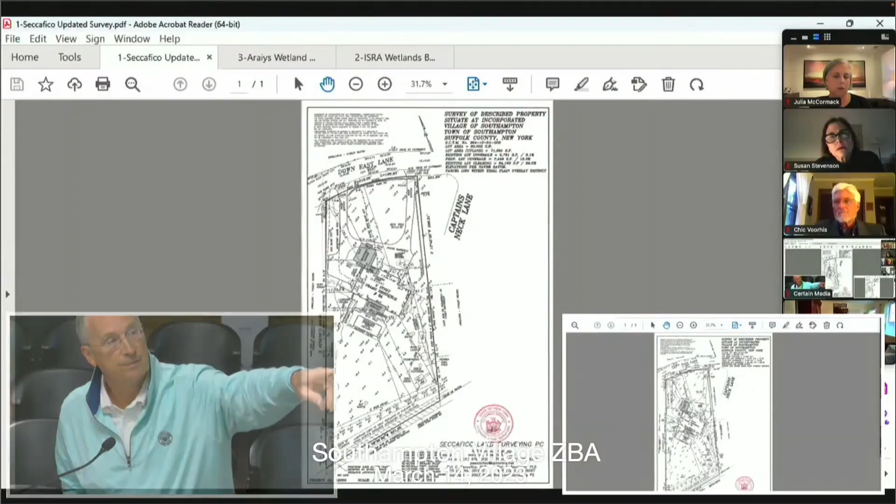At the last meeting, the board asked for a survey showing the position of the existing structures: the fence, the swing set, the trampoline, the stepping stones. So the survey was updated. I'm going to ask John from my office to put that up on the screen so you can see it. All those structures are now located down in the southeast corner of the property, along with the fence. You should all have hard copies of this as well. So there you can see in the corner the play set, the trampoline, the tree swing, and the wire fence.

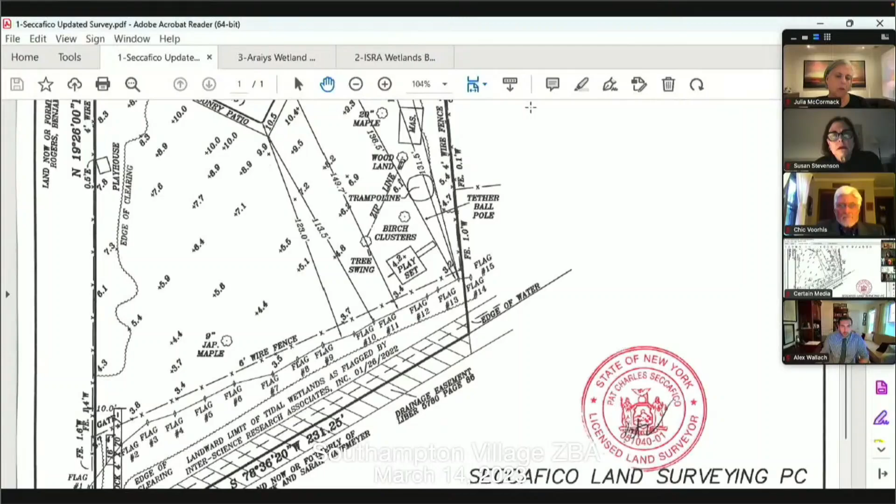We have topography on the survey, and you'll see over here in the bottom left-hand corner where the slate is located, which is where the dock would be.

You asked for a setback for the swing set to the property line and the trampoline to the property line. Although it's not on the drawing, we spoke with the surveyor, Pat Seccafico, this morning. I just found that out yesterday, and we weren't able to get that onto the drawing for you. So the swing set is 19.1 feet from the eastern property line, where the play set is, and the trampoline is 11.2 feet. These are features sitting on the ground. The trampoline is not anchored at all, it just has metal bottom rungs that sit on top of the grass.

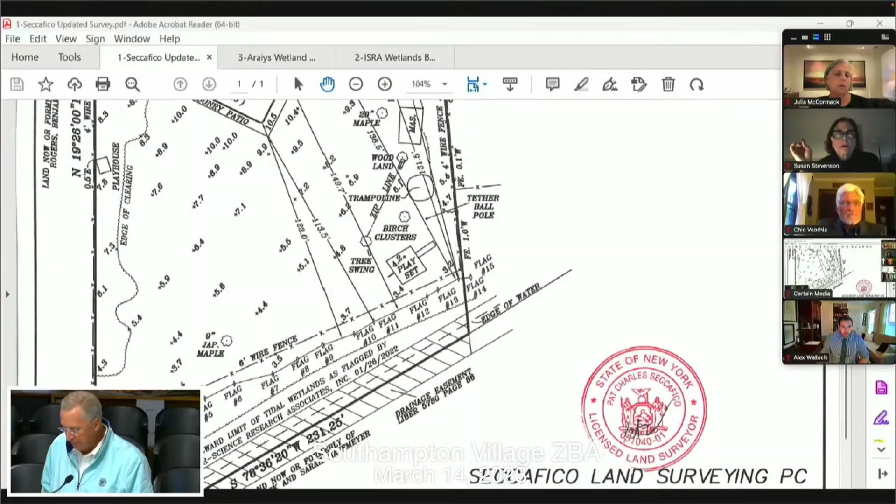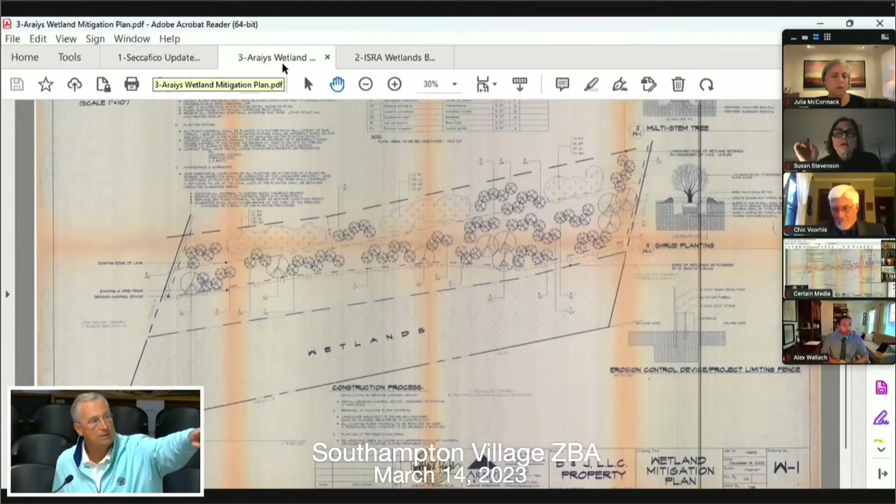The planting plan — you asked for the approved buffer plan to be overlaid on top of the proposed buffer plan. John, can you put up our drawing? Yeah, so this is the Araiys plan, the plan that was approved 23 years ago, which you now have in your file. In this drawing you'll see the property boundary lines at the southern end of the property. You see that dashed line right above where it says wetlands — that's the wetlands line determined at the time this plan was done, and you'll see the buffer that goes up above that.

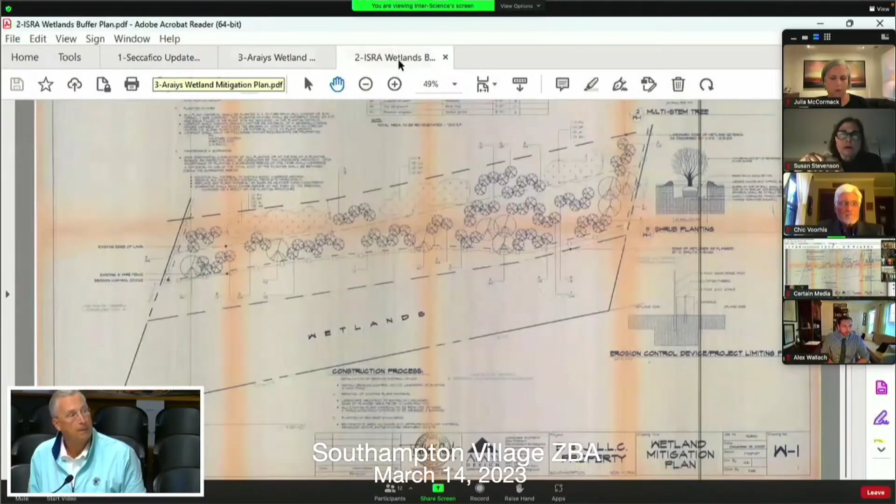We asked to have this overlaid on top of our drawing, so we put that on top of ours. John, can you bring ours up? So you'll see this yellow line right here — yellow and blue line — that is the buffer line edge that was part of the approved plan. And you'll see the other coloration showing the different vegetation, which is showing where we're proposing the buffer now.

You asked about calculating the buffer width between the approved plan and the proposed plan. Because the two wetlands lines are different, it's hard to compare apples to apples, so I measured them from the southern property line. The yellow line showing the buffer created 23 years ago is about 75 feet from the southern property line on average. On our plan, it extends considerably more landward on the western side and gets closer on the eastern side. On the western side it's about 128 feet at its deepest point, and at the shallowest point about 38 feet. Averaging those out, we're probably about an 80-foot buffer by the time we're done. That's the way I've roughly calculated it.

About 60% of the frontage of this property has a buffer that's greater than what was proposed last time through — essentially this area through here and this area through here. This would be the remainder that is less than the 75 foot, which is this zone through here.

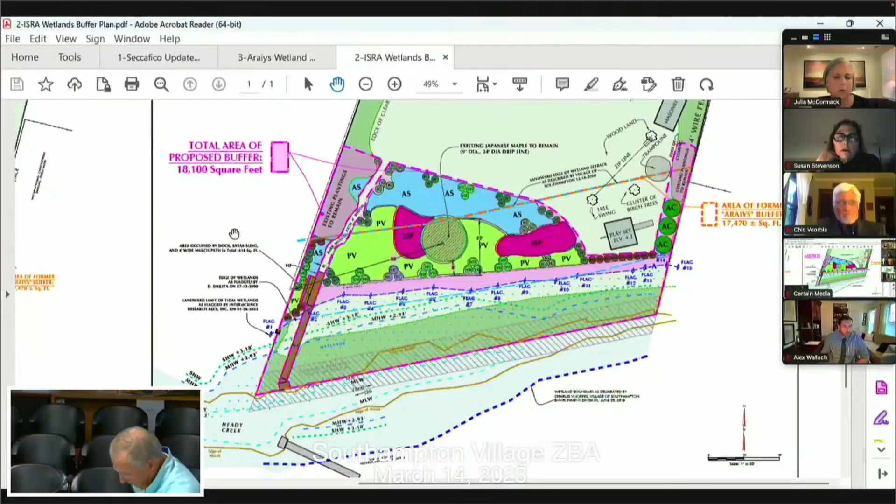You asked at the last meeting that the proposed buffer be expanded and the area of lawn around the swing set be reduced, so that has been done. The area was originally about 65 feet wide around the swing set; where the grass is now, it's 38 feet wide at that narrowest point. The buffer is actually increased in size.

If you look at the area of what was originally the buffer, that was 17,470 square feet. We're now at 18,100 square feet. So we've provided a larger buffer than what had originally been approved.

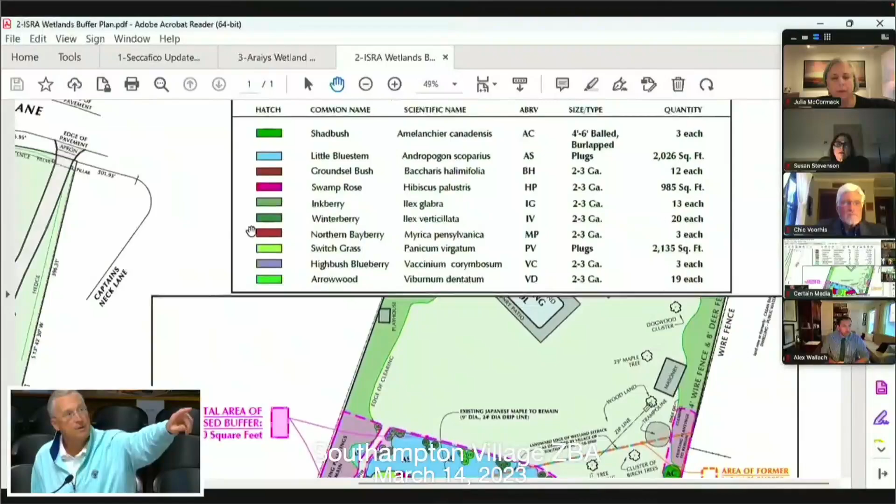You asked for information regarding the spacing and quantity of little bluestem and panicum. John, can you just scroll up on the top, the legend? You actually asked for some details on the planting, so we've provided that information here on this plan.

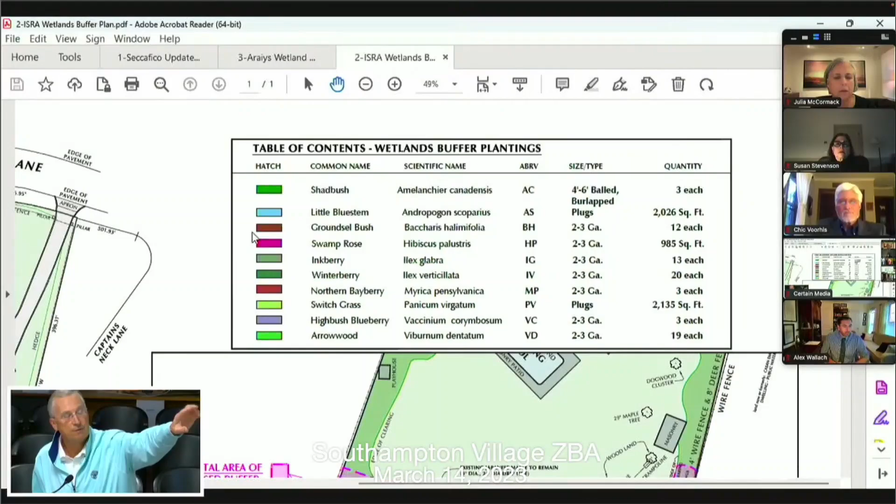I noticed in looking at this that it didn't have the actual spacing for the little bluestem or the panicum, so we confirmed that they would be planted as plugs 1 foot on center. It's a pretty dense planting in those areas where you'll see the square footage under quantities. For the switchgrass, we have 2,135 square feet, and for the little bluestem, it's 2,026 square feet. Those areas would be planted 1 foot on center.

The buffer is going to consist of native trees and shrubs - shadbush, groundsel-bush, inkberry, highbush blueberry, and arrowwood - along with drifts of native wildflowers and grasses like switchgrass, little bluestem grass, and swamp rose. Can you scroll back to the image, John?

So you'll see here on the side of the southwest corner, it shows the proposed catwalk. We've kept that on the plan. It's a 4-foot wide catwalk with a rack for a kayak sling, which you'll see on the west side of the walkway - really just some bars so someone can lift a kayak and leave it there instead of dragging it back and putting it in the lawn.

So we have a 4-foot by 20-foot ramp that adjoins the kayak rack, a 24-foot long fixed catwalk elevated 4.5 feet above grade, and a 20-foot section ramping back down to the little platform. That's right at the edge of the small platform that provides access to the water.

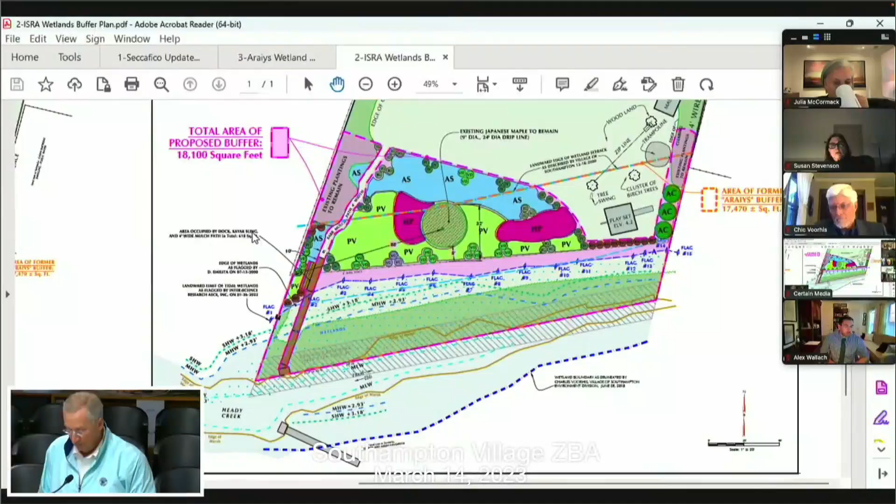There's a ladder that will provide the ability to climb up and down once you get your kayak down into the water, and it's really to provide access for kayaks and canoes. You've got shallow water coming into this creek, and the owner has a mooring further out where he can put a motorized vessel. This is essentially identical to what is across the pond in terms of functional use.

You can see on the bottom of our drawing, that's at 405 Captain's Neck Lane. We had actually done that approval for those people some time ago.

The construction's all untreated materials. It'll have an open grating surface, minimum light transparency is 60%, so it's that open grate that allows vegetation to grow underneath. It'll all be constructed by hand. We've received permits for the dock from the trustees, the DEC, the Department of State, and the Army Corps.

So I guess I'm here to try to fill in for Jim, but we think that the buffer plan we have is reasonable given that this client purchased this property with an understanding at the time that there wasn't a buffer here. We've tried to be fair and reasonable in terms of the size and location of the buffer, and the ability for him to have a small play area for his children, down in an area on the lawn that's flat. You have a sloping area from the pool down to this corner, so it's actually a flat area where there's a place for the kids to play.

So we don't believe that this revised buffer plan will have any negative impacts to the protection of the waters of Heady Creek, and we think it's substantial - it'll remove a substantial part of the lawn. So I'm here to answer any questions you might have with respect to this.

Sure. Good evening, everyone. Thanks for the introduction earlier, Mark, and where to look, Rich. Good to see you. Thank you for the summary from you and Carl as well. Trying to figure out where to look. Probably on the TV screen. I'm not there in person, obviously.

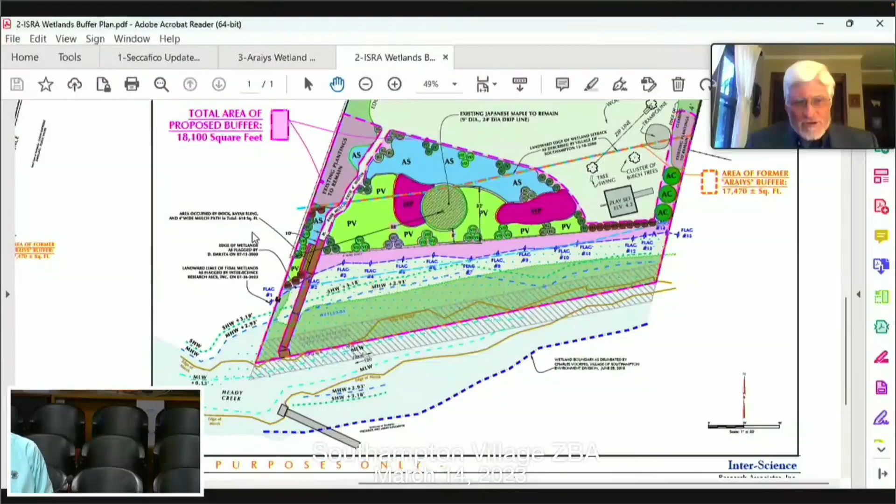So, thank you, Mark. Rich was describing a submission that was submitted to the village on February 24th. Rich did a good job identifying the discussion from the last meeting and bringing things up to date. I'll further note that at this time on the plan, the prior buffer is shown, so we have a relative understanding of the prior approval, the buffer area, and how large that was. The buffer equivalent shown is really the expanded buffer, as described, that exceeds the area of the original buffer.

The planting plan detail has been added - that was one of the requests - and the native plantings shown are acceptable. I do think it's important to look critically at the area where the buffer is being encroached upon, and that is specifically the play set and some of the other recreational items, such as the trampoline.

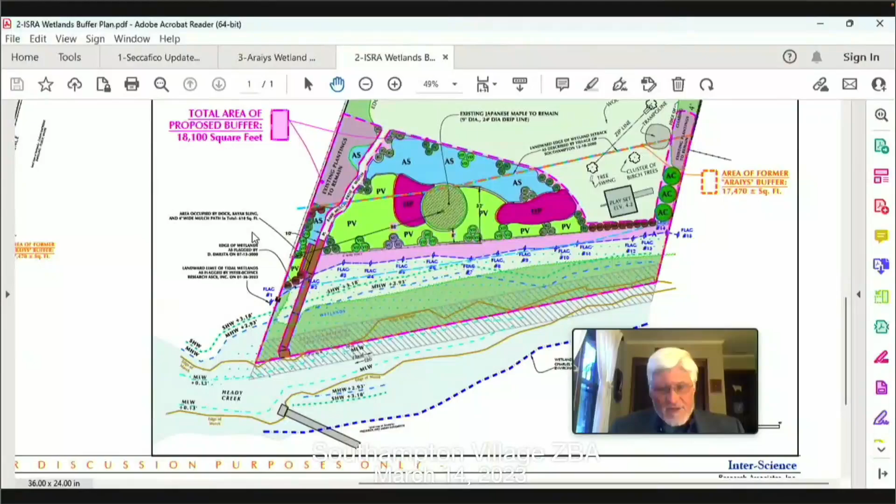In doing that, I want to go back to the village law under Chapter 116 and what it's trying to do. If something like this came before us now, we would be looking at a buffer of 125 feet. A greater buffer provides greater protection for the wetlands, and it's considered adjacent area - at least that's how the state defines it. But in village law, it is the landscape buffer, and it's intended to be naturally maintained or revegetated.

That adjacent area protects the wetlands and their environmental benefits. The wetlands themselves have many benefits, including habitat, biological productivity, ecosystem cleansing, absorption of silt and organic materials, shoreline protection, flood control, and in some areas educational value. That's the benefit of the wetlands associated with the creek that this adjoins. The actual adjacent area, or the village landscape buffer, is very important for protecting those wetlands. It also provides its own wildlife habitat, pollution absorption, erosion control, and further protects the wetlands.

So we know natural buffers are important. They also reduce the fertilized lawn area, and reduce areas for congregation of dogs, geese, or other animal life that may impact wetlands, other than native species, because it becomes a recreational area as opposed to a buffer area. The wider the buffer, the better the protection, and this is reflected in village law under Chapter 116. So in my mind, ideally, the play set should not be so close to the wetlands.

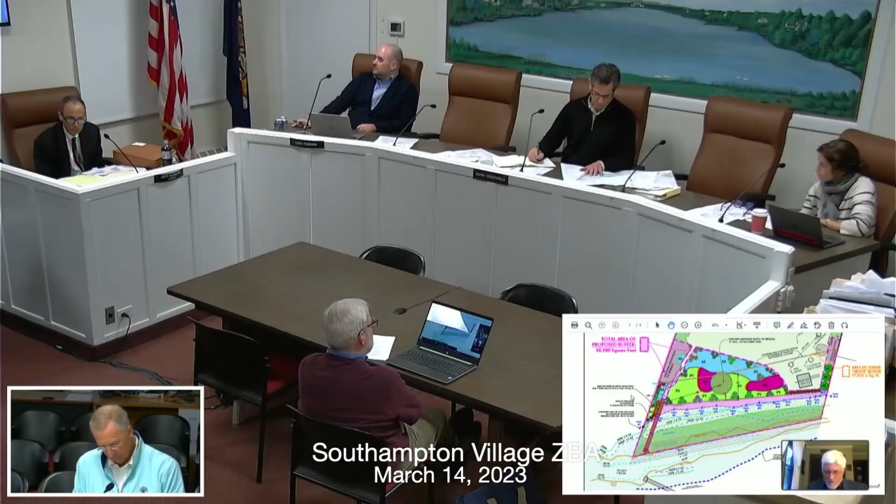So I can further comment on mitigation or other ways to help maintain the play set, but also have some environmental compatibility, if the board wishes to consider that further. I'll pause there and see if there are any further questions, or how much discussion we want to get into on the placement of the play set itself.

Ideally, under current law and current review, it would not be located in this location. And there are other areas on the property where it could be located.

If we were to consider allowing it to remain, I would look for additional mitigation because of the encroachment within the setback area, and that minimized buffer. Yes, this does achieve a buffer equivalent, but if you look at the placement of it and its proximity to the wetlands, I think additional mitigation really is appropriate.

I'll spell that out again for the ZBA to consider and for the applicant to consider as well. It was mentioned that the trampoline is a movable object, just a moment ago by Rich. That should really not be within the area that is part of what would have been the buffer imposed in 2000. So moving that out would not be a hardship, and there's plenty of other area for that to be relocated to.

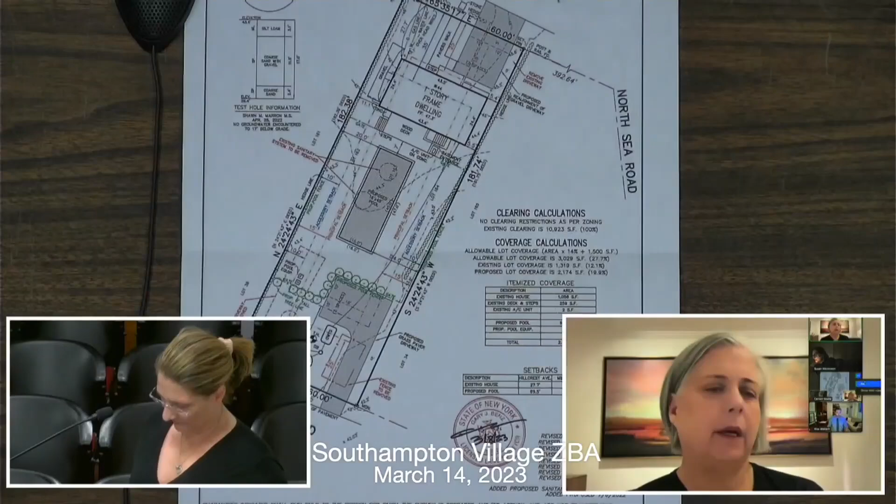Face it toward the board. That's good, yeah, you can zoom in. There we go. Okay, does that work? We needed full screen if that's possible.

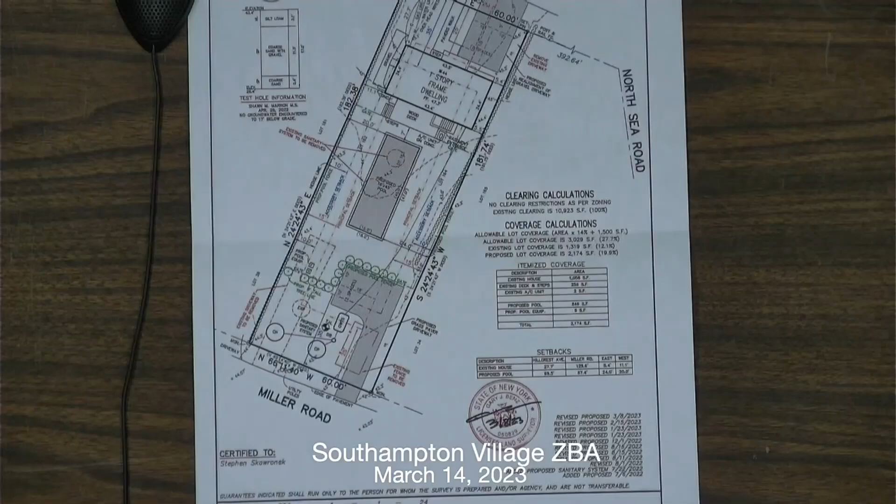Hey Council, I'm gonna walk away so you can see. Can we full screen and zoom in a little bit? That's full screen as it gets, unless you turn it sideways. See, one like that, you can turn it sideways, then we can see the parking. You want to see the front first, or I can do both at the same time. It's really the parking we're focused on, isn't it?

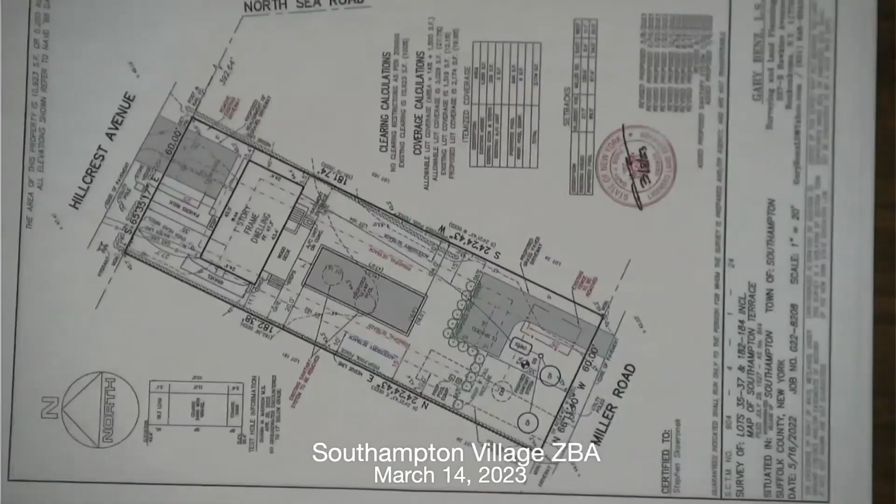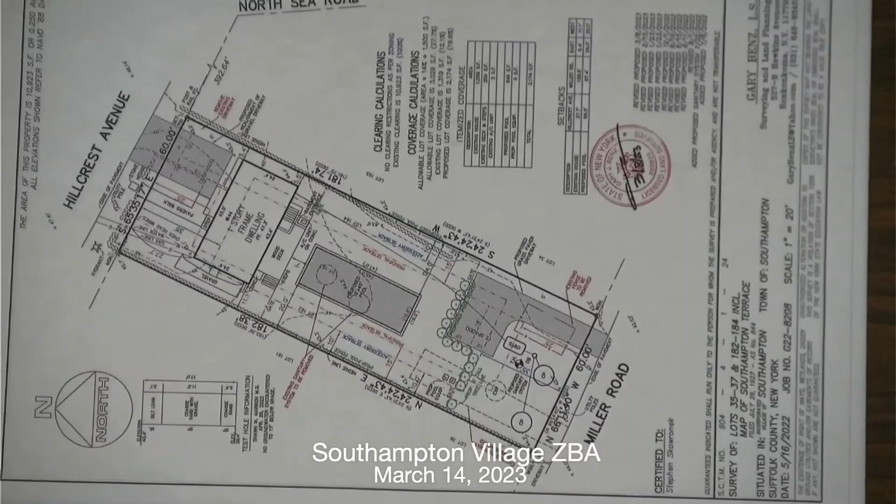Yes. So as I said, we needed to add, or demonstrate, 4 compliant parking spaces, which had to be a certain width, a certain depth, and also had to be situated 5 feet from the front yard lot line on each side. So you'll see that along Hillcrest, there are 2 spaces. Essentially, as they exist today, there needs to be a slight modification, enlargement of one of the spaces so that they're both compliant with the required size on Hillcrest Avenue.

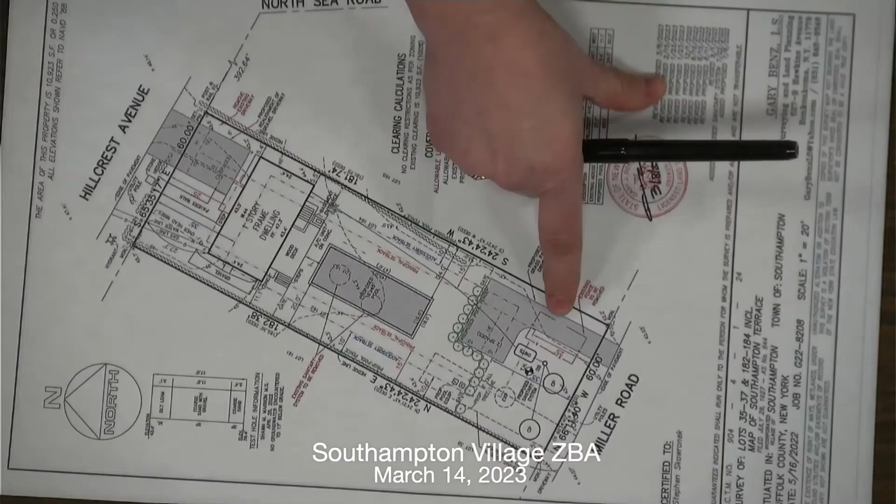And on Miller Road, you'll see that you will come up here and take, I guess that'd be a left, into these 2 spaces here, on the other side of the property.

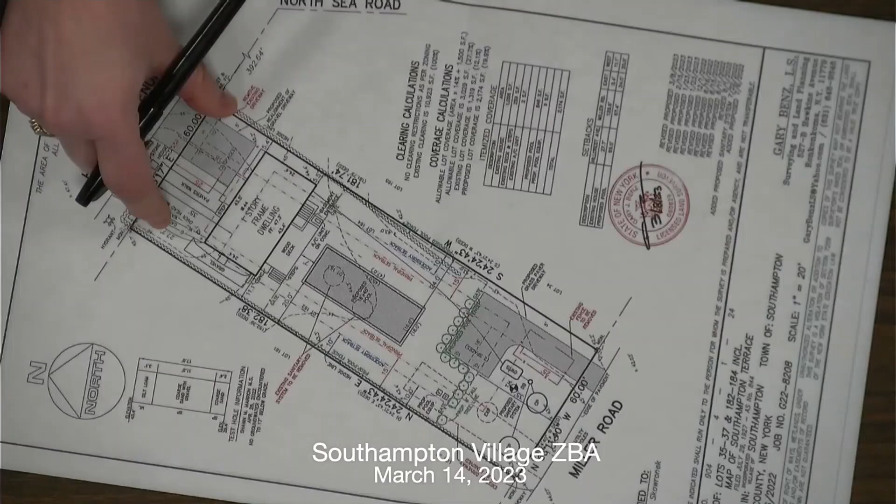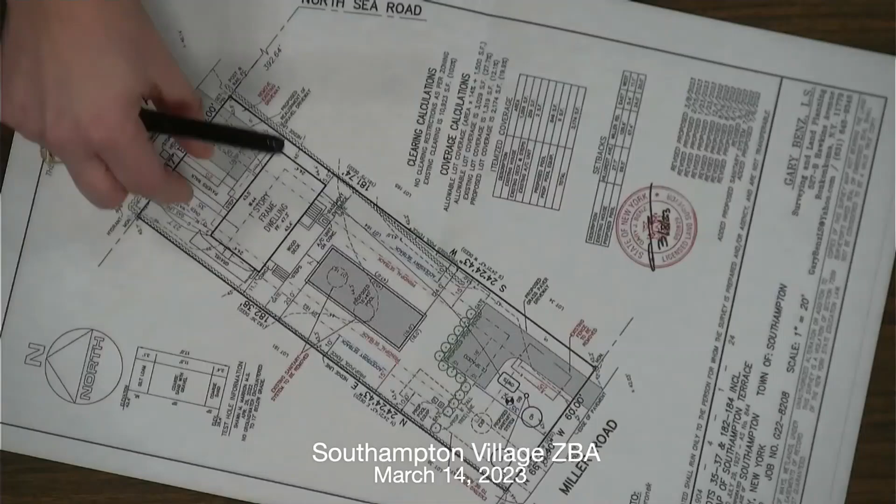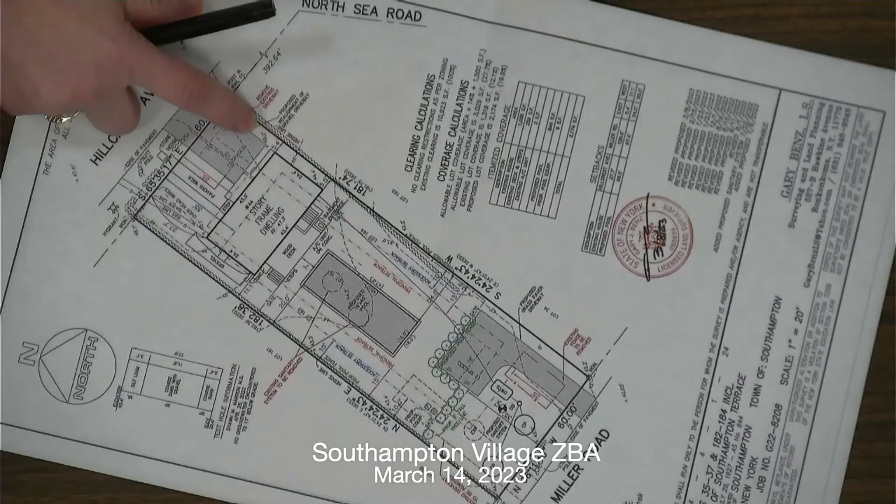We did look at trying to situate all 4 on Hillcrest Avenue, and we actually had a planner prepare an image for us so we could see what it looked like, and unfortunately it takes up basically the entire front yard. So you could imagine this would double in size. It takes up this amount of space, which is basically the entire front area, which now is a cute, aesthetically pleasing lawn area that's vegetated, and unfortunately would become gravel. We could vegetate around it, in between that and the house and on our side yards, because we have our setbacks there. But other than that, the rest of it would have to be gravel, and that seemed unfortunate.

How many bedrooms are in the house? I believe it's 5. There are 5 bedrooms in this house? Yes, yes.

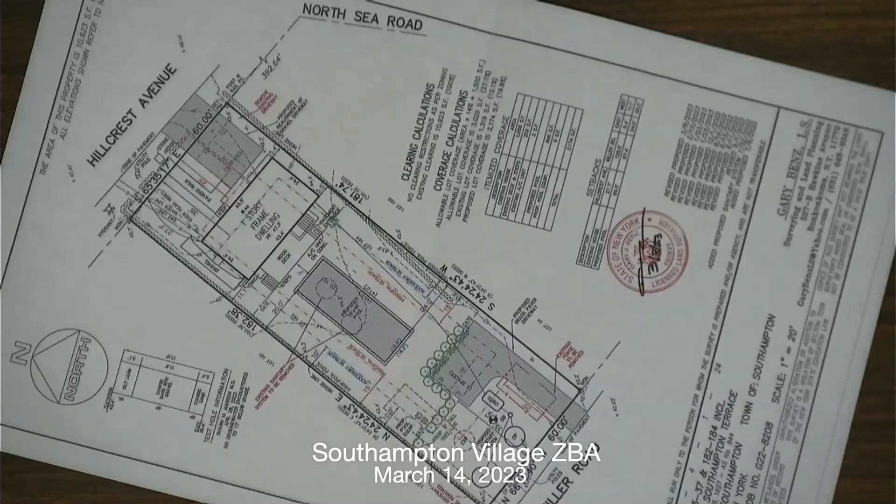And we proposed screening on the Miller Road side as requested by the board. As you'll see, screening in front of the pool area here, screening here, and then screening here as well. All 6 to 8 foot tall trees that will be evergreen.

Do any board members have any questions? I just have a small one, and maybe you said this already. Is there a reason why the parking area on Miller Road isn't just like a reflection of what's on Hillcrest? Did you say that already? Oh, the same, because of the septic system.

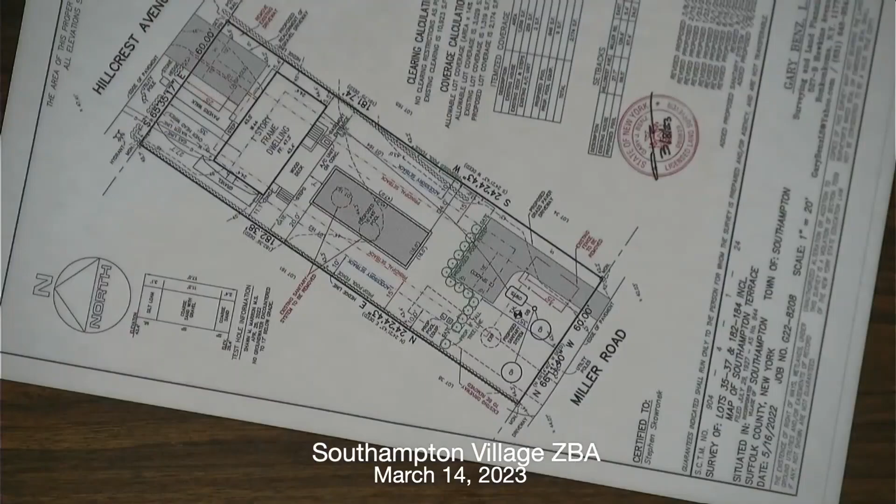So we did 10 variations, if you can believe it, and each one I came up against a setback of some sort, and in that case it happened to be the septic system. The amount of room that it needed was just too large. I couldn't fit the required setback from there, and we were trying not to go over the septic. I know you can technically, with a covenant and some extra fees to the health department, but for logistical purposes, we were trying to keep it off the septic.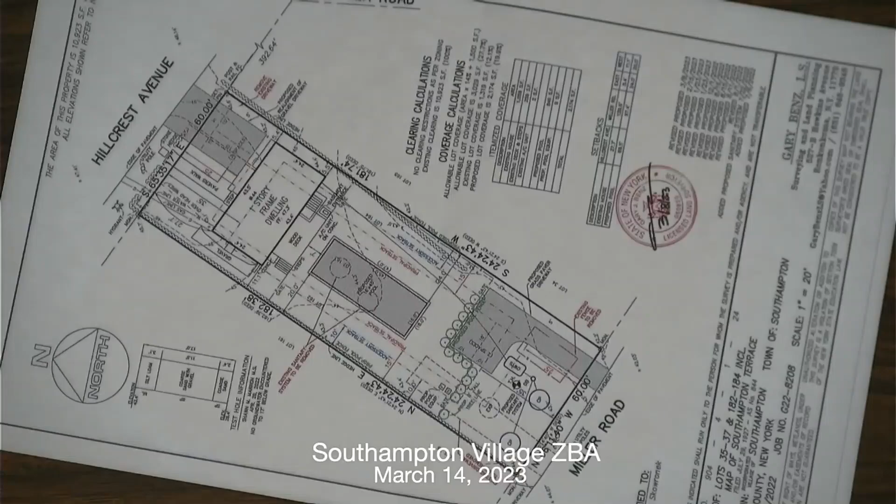Fair enough, I get it. But this says proposed sanitary system. It's a new septic, yeah, we have to upgrade to the IA system. Because, why? Well, environmental reasons. Oh, I'm sorry, they pull all the houses into compliance now.

Well, but you're not doing anything to the house, as I understand. You're adding the pool, but yeah, because of adding the pool it triggers it. The septic is actually where the pool is going, so it does have to be relocated. So you're relocating the septic because of the pool. Yes.

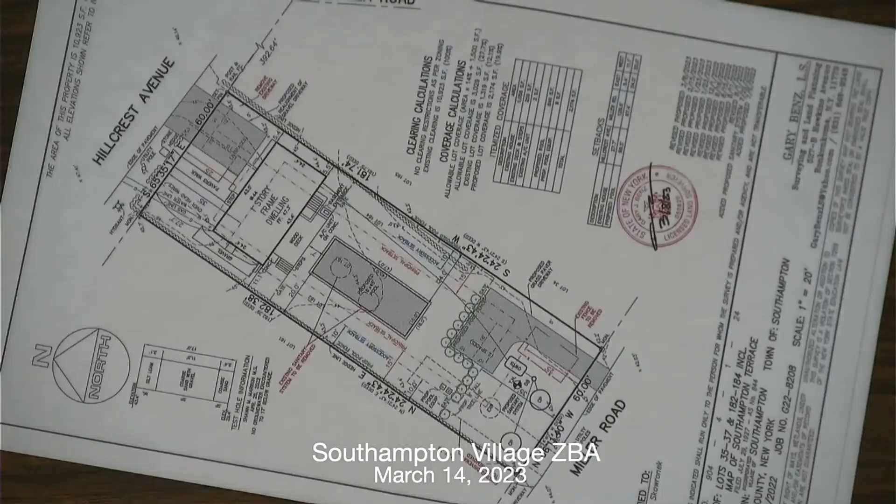Yeah, the two rings are like directly where the pool is now, and they couldn't get a ring where the proposed pool equipment is. Is that too close to the neighbors? Behind. Yeah, so we put an expansion ring over here.

I don't know, maybe they could. Yeah, I don't know why they couldn't. I mean, I guess we could.

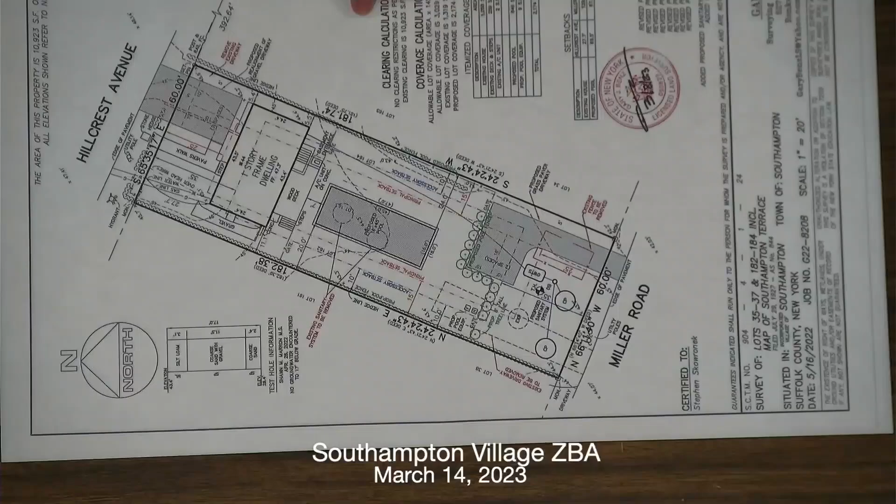Not to make this application drag on another 7 months, but I would request a parking waiver for this if I were you. Meaning on the number of spaces required? To have 4 spaces, maybe have to have 3, because this is like the polar opposite of the application we saw before. I can see that the 4 required spaces does start to create a detriment to the homeowner when you factor in the size of the lot, the need for the new sanitary, and all that.

I'm not telling you what to do. Understood.

Just to think out loud, myself and some of the other board members were hoping this would be a case where we're considering parking where parking didn't previously exist, and the pool is fine, but we were hoping somehow to eliminate the ingress and egress from Miller Road.

Isn't that wonderful? We looked at it 50 different ways. If I could share my screen with you, I would. We do have an image of what it would look like to have the gravel in the front, and it's very unattractive.

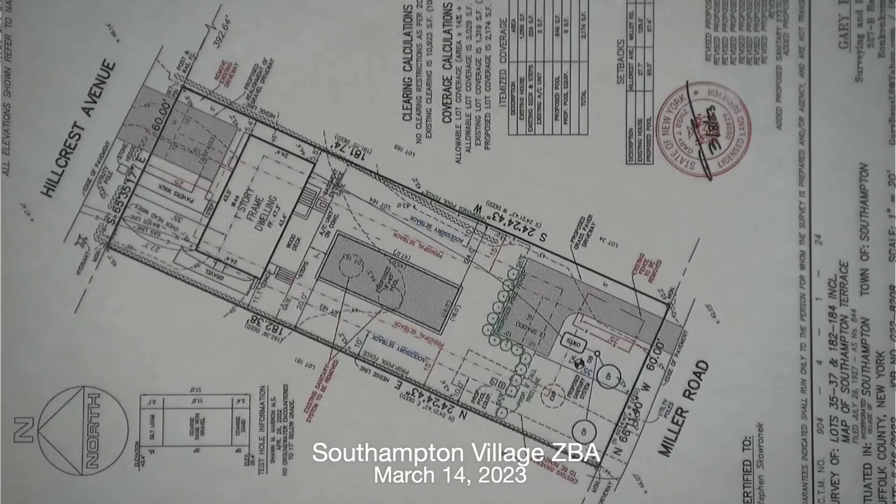Want to look at that. Maybe if it's 3 parking spaces. I'm not a big fan of a completely gravel front yard personally.

I'm less of a fan of the idea of there being an entryway on Miller Road and on Hillcrest, given the stance we've had for so long about swimming pools in the front yard.

I don't see how they can get around that and still have... First of all, how do we know anyone's ever gonna use those parking spaces? They're just required. That's true.

I will say that there's an ARB approval on record that shows 3 spaces on the Miller side. As you know, right now there's just a driveway. The physical spaces were not actually put in, but the drawing shows a very large driveway with 3 large spots. Can't you make the spaces out of permeable pavers or grass? Yep, they could use grass pavers, definitely.

So then what's the rub? It looks like that's what they're proposing on Miller, yes. I think that's a good idea for the driveway. I understand it's a requirement, but you cannot drive a car past the house, so you're limited. I think to completely make the front yard gravel is a real assault on the neighbors. Agreed, I would not agree to that, so there you go.

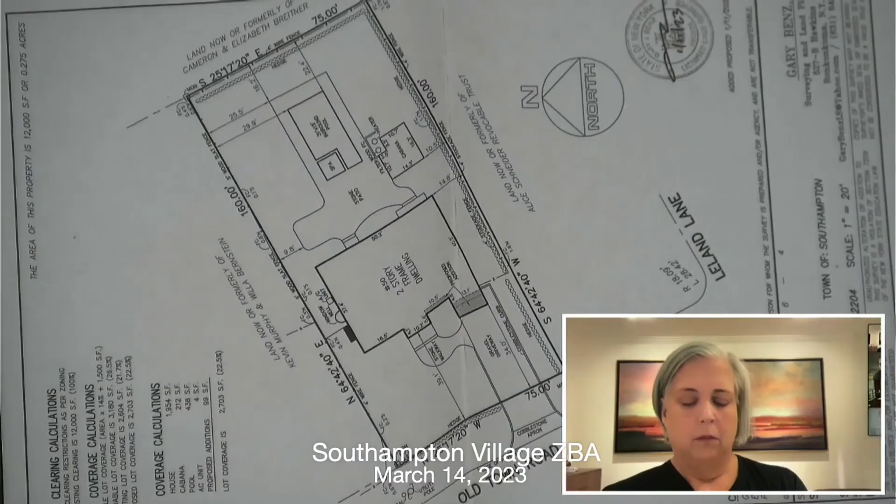We're looking for a total side yard variance. The existing house is non-conforming to total side yards. It's conforming to minimum side yards, but not the total side yards. Our goal is to push the garage 6 feet forward, which is still 4 feet further than required.

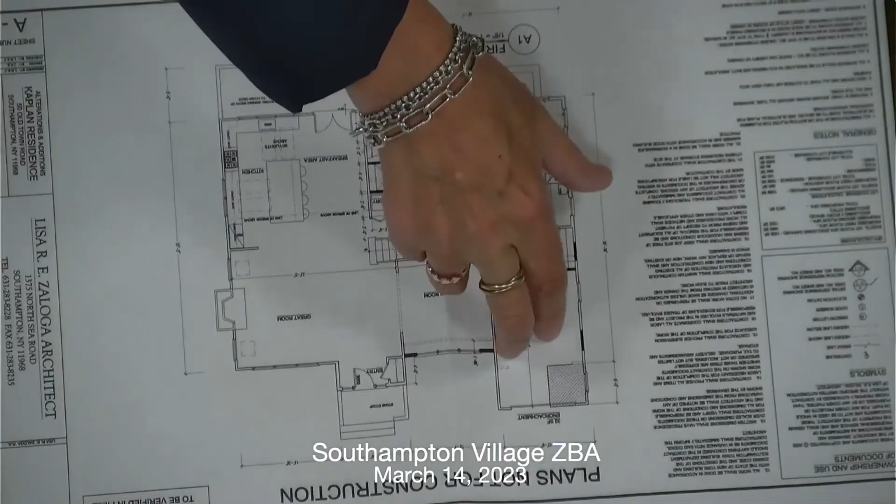If you could just turn the plan, rotate 180, Lisa. There we go, okay, it's over here now. Our goal is to push the garage forward 6 feet towards the street, which is still 4 feet further back than our required front yard.

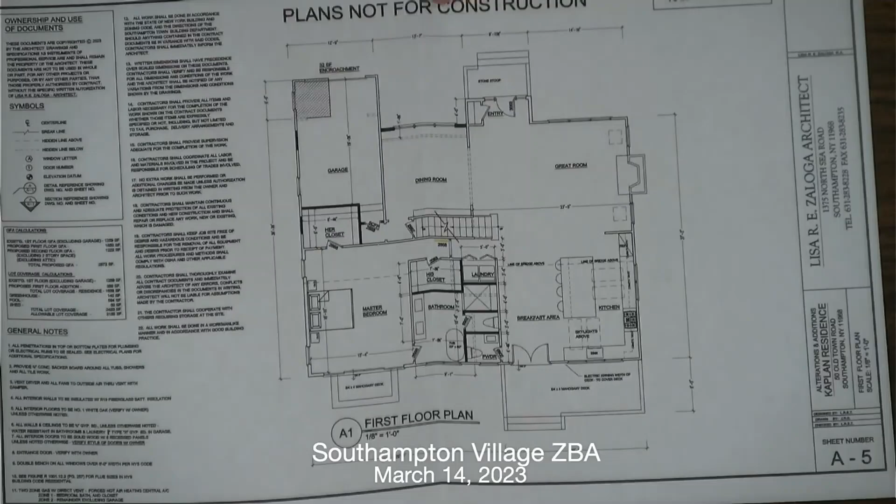However, to line it up with the existing side yard requires a variance for our total side yards. It's a total of 32 square feet, it's this little corner right here. And I have a letter of support from the neighbor on that side, the south side, Andrew Polaro, who wrote a letter.

As well as I have a letter of support from a neighbor two houses to the north. We went in front of the ARB yesterday, and they didn't have any problems with it, other than asking me to put some more decoration on the front gable, which I'm not asking for a variance for, but they didn't have any issues with it. So that's pretty much the general idea.

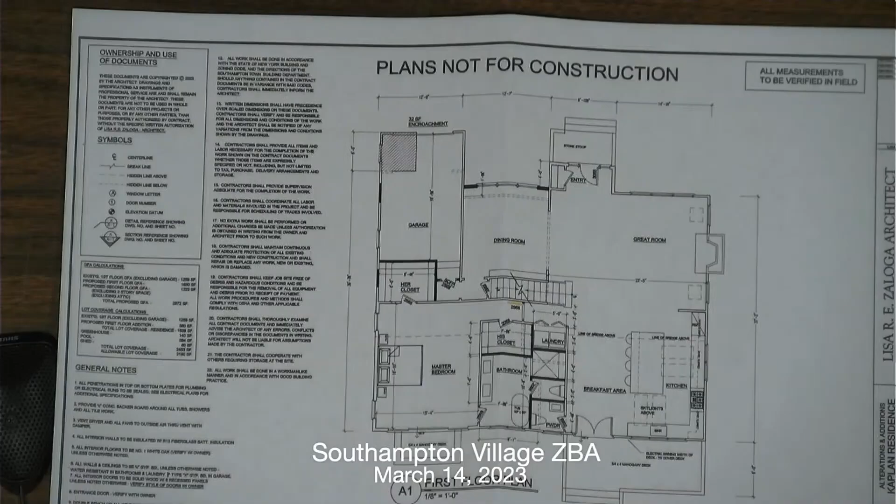So what's the total side yard setbacks? The total side yard setbacks are, on that side, it's 14.8, and on the other side, it's 9.8, so a total of 24.6. Where 30 is required, I believe.

Is that correct, Alex? The total side yard setback here will be 24.6 feet where 30 is required? Correct, I believe that's how it's written on the denial as well. But your improvements, your additions are not going any closer to any of the side yards as the house currently? Correct.

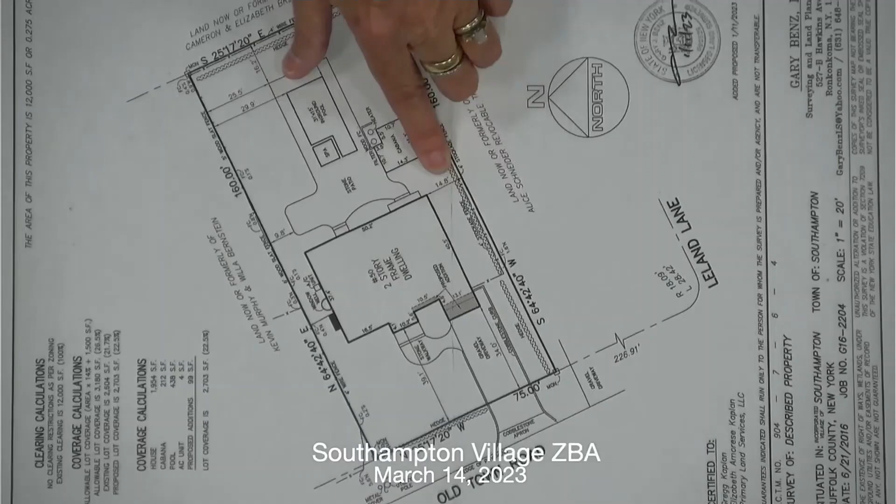Lisa, and this, that side yard, that's the 14.8 foot side yard that's currently existing. So you're maintaining the 14.8 feet, you're just moving closer to the street, correct, and you're within the front yard setback.

What might be helpful even more than the survey is the first floor plan. This is the first floor plan. It's this little square right here. Okay, so I'm with you. Do you have an existing first floor plan? Yeah. Can you show us the benefit to the applicant?

The benefit to the applicant is that when they bought this house, it was not a full-time year-round house, and now it's about to become one. So they were trying to increase and create a closet for the master bedroom, and that's what caused us to push the garage forward some. These dotted lines here are where the existing floor is. I didn't bring an actual first floor plan, but that dotted line is where the current garage ends now. So it's 6 feet forward, and the majority of it, of course, is conforming.

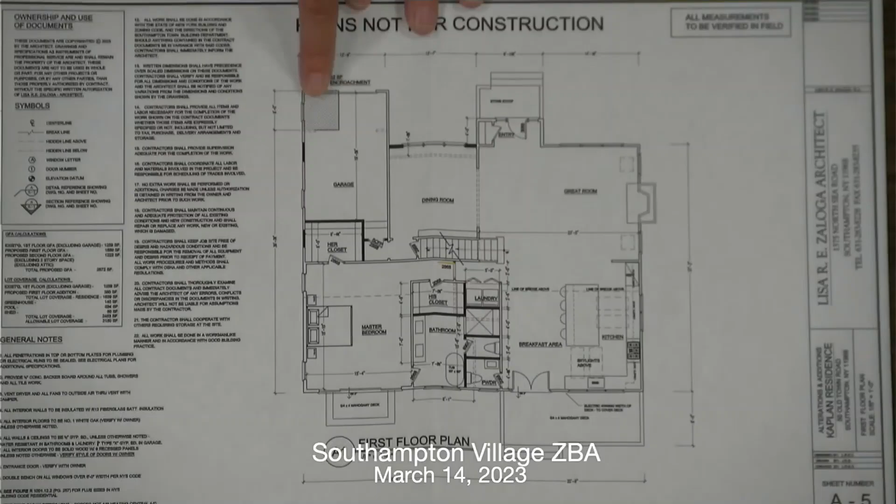It's just this square on the side here. It's like the sheet of plywood.

Are you expanding the second floor as well? We are, we're expanding the second floor. I have the second floor plan if you want to see it. That doesn't require any variances.

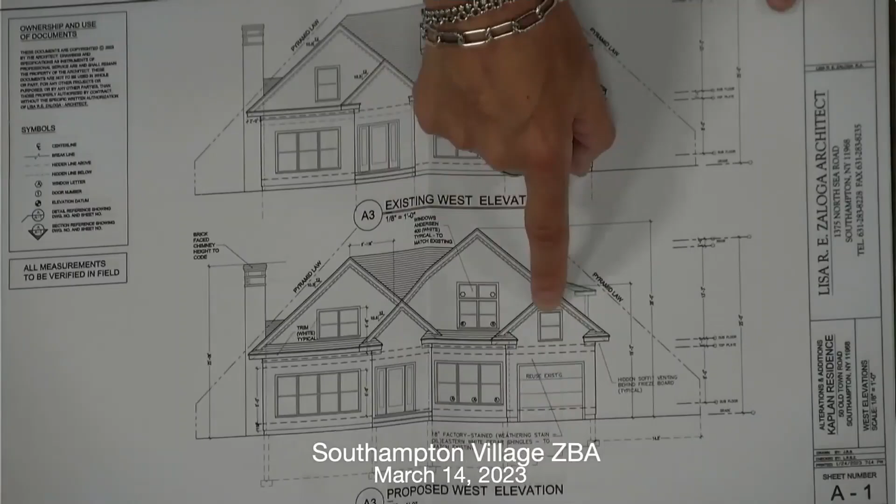Isn't that also part of the setback from the side yard? Isn't it above that? It is, but if you look at the elevation here, you can see the dotted line is the floor level. Can we zoom in? So the dotted line here is the floor level over the garage. So there is a window over the garage, but by the time you get to this ridge, it's like 7 feet, which you can see on this floor plan here.

So I've kind of called it a closet. My plate height at that wall is 4 feet, it doesn't meet habitable space or anything, so it doesn't count towards gross floor area. Nothing else on the second floor.

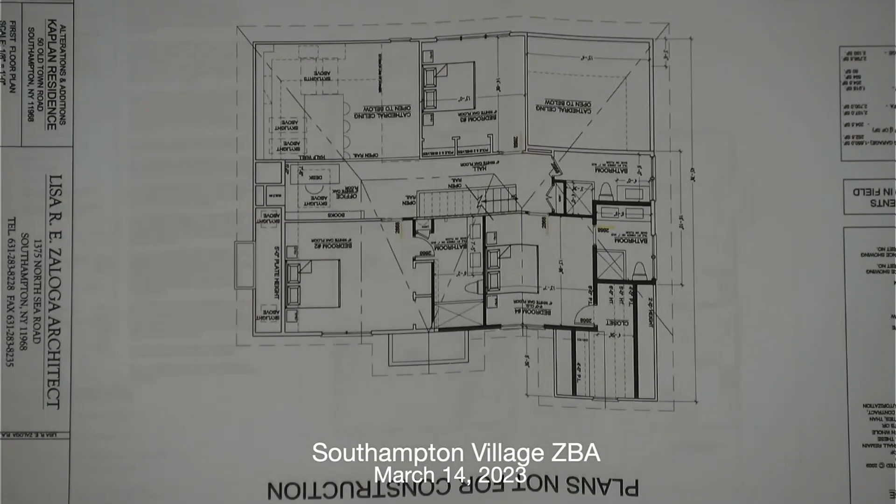Luke, do you have any questions? No, it's a big bedroom. This bedroom? Yeah, it's like 19 feet wide, right? No, 18'10"? This bedroom, downstairs, first floor. Oh, the first floor bedroom, yeah.

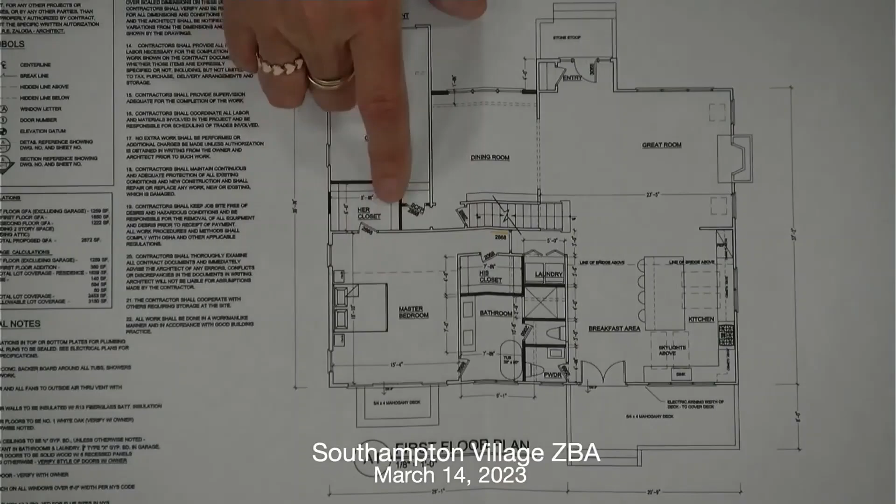That is an existing wall. I mean, I suppose it's wider than, but that's existing, I didn't try to maneuver with that. I had the existing windows, the existing bedroom.

I was just trying to maintain what was there. So you're creating a second closet. I'm creating a second closet. Right, that's the goal. I mean, I'm just not seeing a substantial detriment to the neighborhood.

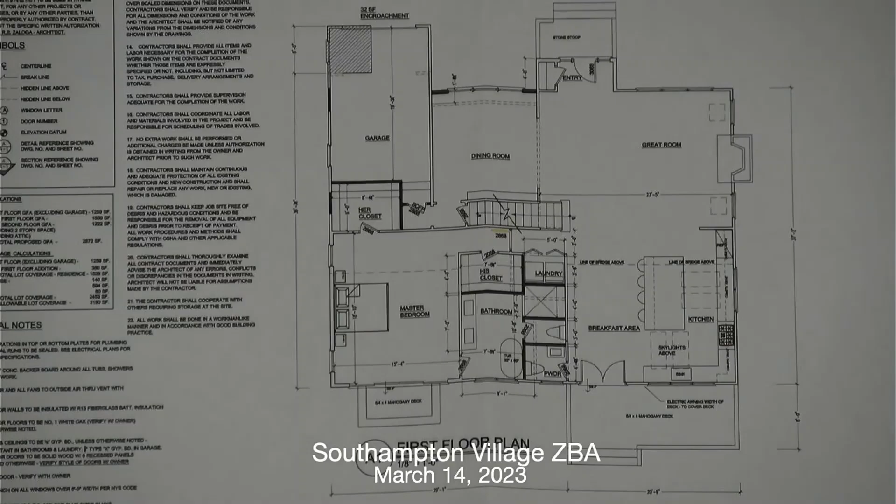No, and like I said, Andrew Polaro wrote the letter saying he's in full support of it. He's the neighbor to the south, the closest neighbor. Julie, and or the Susan? ARB had no problems with it either. Yeah, I watched, I went over and looked at what's there, and I hear what she's saying.

And the way the garage sticks out when you look at the property from the street, so moving the garage forward, I don't think is really detrimental. And however many feet for a closet, it doesn't bother me. It's okay with me.

Julie, do you have any questions or comments? No, not on this case. Joyce? No, I mean, it seems like a pretty minor ask for what they're trying to achieve, I think.

So, I mean, I would motion to close for all purposes. Is everybody okay with that? Okay, so I'll motion to close for all purposes. Can I have a second? Second. And all in favor?

Aye. Thank you. Then I'll motion to close the public hearing of the Zoning Board of Appeals. Can I have a second? Second. All in favor? Aye. Thank you, everybody. Thank you.